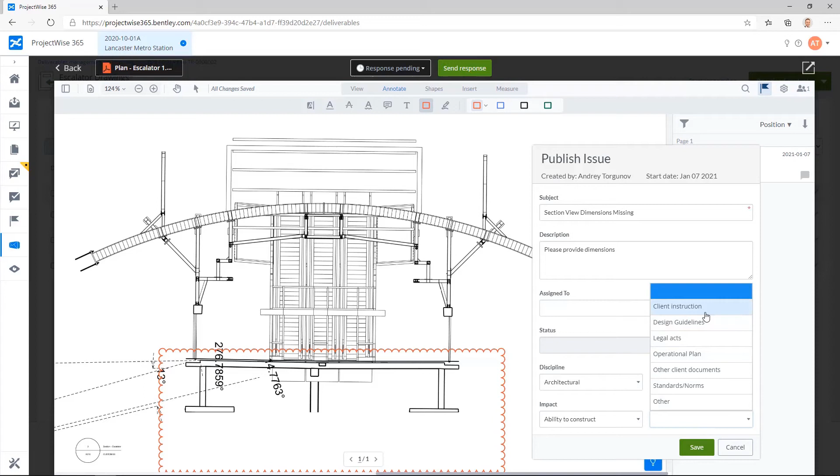You also have the option of adding additional information from the drop-down lists associated with discipline, level of impact, and non-compliance in their dedicated fields. The issue has now been created.

Now we can navigate to the Response Pending drop-down and choose the appropriate response. In this case, we'll select Revise and Resubmit.

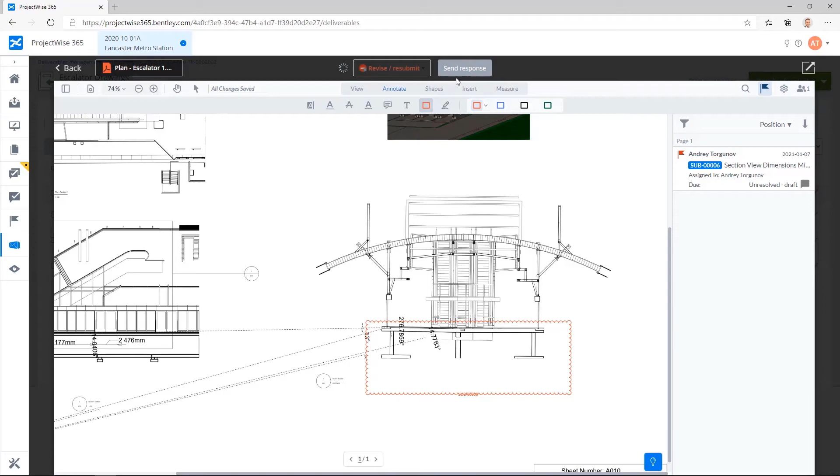Before sending the response, here you have the option to add additional comments for the whole document, and then click Send Response.

Now we see that 1 document has been responded to along with the number of issues pertaining to this drawing and the current status of those issues.

As a reviewer or coordinator, you may want to request input from additional reviewers for 1 or several documents in the package. This can be easily accomplished by first clicking on the Additional Reviewers tab. Next, click Add Additional Reviewers and select 1 or several internal participants that you require input from.

You have the option to assign consolidator status to any of the users you select. This means that all reviewers will report into those with consolidator status. This capability can help you organize a hierarchy of reviewers when required.

When ready, click Add Selected, then set a due date for the reviewers and add an optional message if required, and send the request.

Once the additional reviewers provide their responses, you will receive an email notification to see any changes. Click on the Open Portal button as previously, go to My Response, and then click on the additional reviewers. You can now see the responses they have provided, and you have the option to change the view from Show All Reviewers to Show Only Additional Reviewers, which will show only the response from the consolidator of the reviewers.

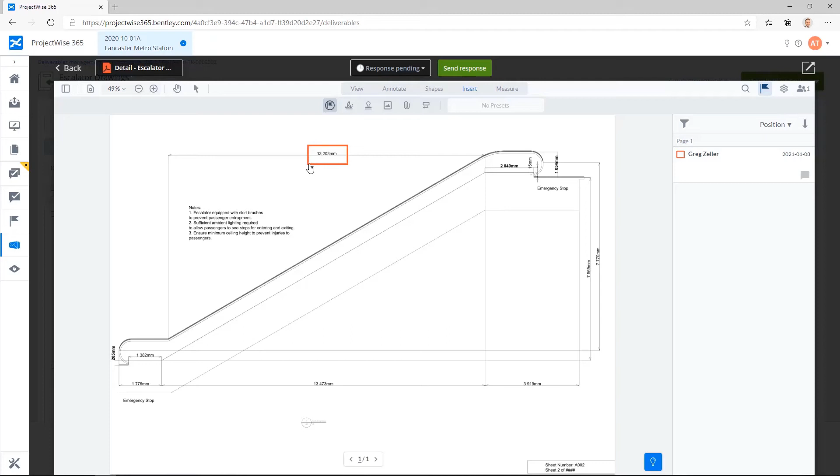Clicking on the document will allow you to review the markups created by the additional reviewers. Since the drawing was approved by the consolidator, there's no need to show that this markup was added by a different reviewer. To eliminate confusion, we can simply delete this markup as it is no longer relevant.

When you go back, you will see that only the consolidator's response remains. Now to add your response, click on the My Response tab and choose a response from the drop-down list.

If you prefer, you can summarize all the responses from all the reviewers by clicking the checkbox next to the document, then select Summarize Responses here. We see that since the consolidator approved this drawing, the response is set to Approve. If, for example, you had one approved and one rejected from the additional reviewers, the consensus response would be Rejected.

Looking at the responses provided so far, we see only one document has not yet been responded to. In this example, we will go ahead and approve this drawing. Clicking on Send Responses will deliver your responses to the creator of the package.

Next, we will show you how to review, verify, and approve changes in the new revision of the previously rejected drawing. Once the revised drawing has been submitted to you, you will receive an email notification. Click on the Open Portal button and acknowledge the package.

Here you can now see the transmittal package has a suffix added to reflect the new version. Clicking here allows you to go back to the previous version as required.

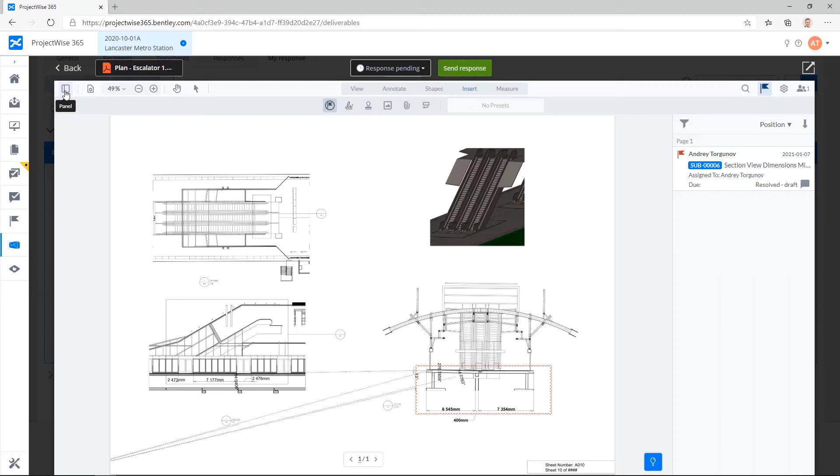For more complex cases, it may be necessary to perform graphical comparisons of two revisions of drawings. To do this, click on the panel icon at the top left of the screen, then navigate to the folder of the drawings you wish to compare. Then click Version History.

Now you can compare the active version you have opened to the previous version. Next, click Compare and rotate the document if necessary. This will overlay the active version of the drawing over the previous version and highlight all of the new additions in red.

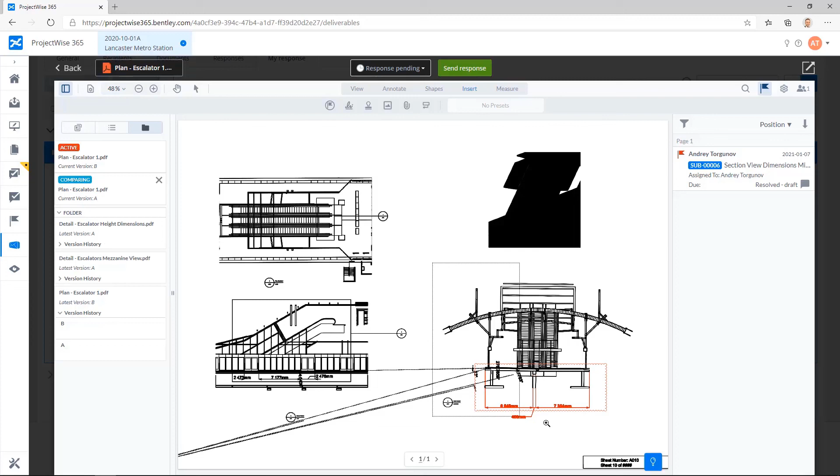When done, click Back. Next, choose the appropriate response from the drop-down list. In this case, we will approve this drawing. Click Send Responses and then Confirm.

We now see 0 open issues against this drawing, as well as 1 closed issue which has been resolved. Clicking on Review Response History provides visibility into the entire response history associated with this submission.

As the originator of a transmittal package, you will be notified when responses are received. Navigate to the portal and click on the Responses tab. To review markups and issues in rejected documents, first click on the document to review.

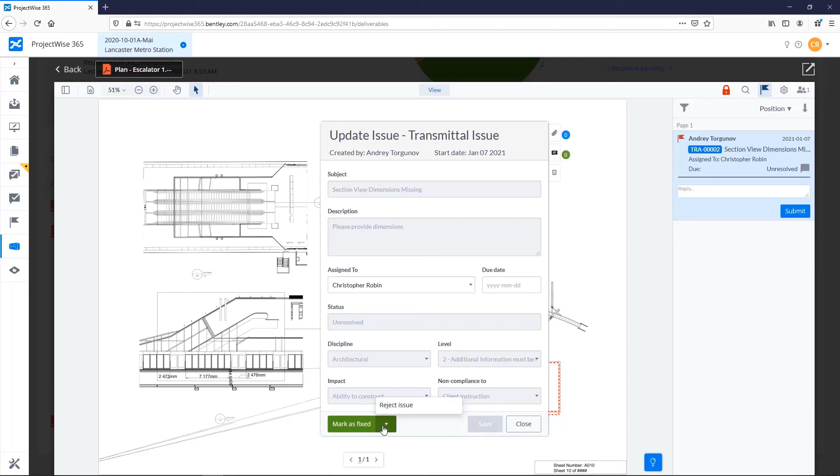Here you can review any of the issues that were created during the review process by clicking on the issue icon in the markup. Once corrections have been made to the document and you are ready to submit a new revision, mark the issue as fixed by clicking here. You also have the option to reject the issue.

We're back to the main responses page and ready to resend new versions. In the Documents tab, you will see that the documents that need to be resubmitted are conveniently highlighted. In this example, there is one plan that needs to be resubmitted.

Navigate to the folder where the revised drawing resides. Select the new revision and then update the version to match the version of the document.

Now we are ready to issue this package for re-review. Look at the cover letter as before and then click Confirm. After the package is issued, it will have the original transmittal number with the version letter B appended to it.

If for any purpose you are required to review the previous submission, you can always go back and select the superseded version. Here you can see the original submission and the responses associated with that submission by your recipients.